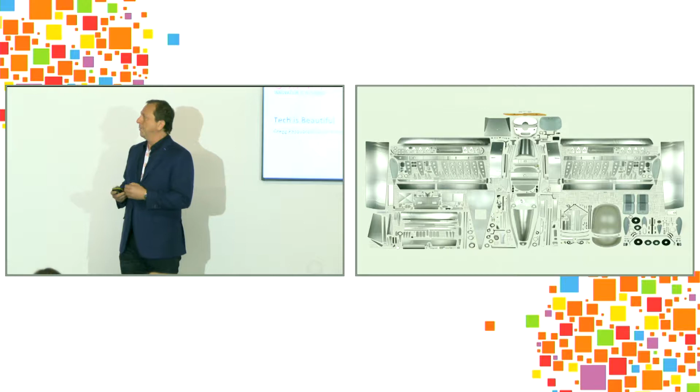So I think that one of the things that we did, I'll just tell you, was we started to question the way in which drawings were made, the way in which we documented not only the buildings that we wanted to make, but the cities that we wanted to have in the future. And so oftentimes we realized that the way in which architects communicate was not necessarily the best way to do it, so we started to think about new ways of drawing, new ways of production, and thinking about buildings more like products, and instead of construction, more like manufacturing.

And very early on in our research, we did some very small buildings that helped us begin to think about that, where the actual drawing set was very different. It was either instructions for machines to make the parts, and then visual instructions for people to put those parts together. Let's hope this guy works.

And then even the kinds of drawings that we're doing inside the studio right now, we realized that looking at plans, sections, and elevations, as architects and designers and city makers, we think in 3D, 4D, 5D, but then really we reduce a lot of that intelligence into 2D and then hand it to people who have to take that 2D information and bring it back out to 3D. And what we've learned is that if you really want to make these kind of special buildings, you need new kinds of drawing techniques in order to help people understand what you're doing, how it goes together, what the materials are, what the efficiencies are, and how to do it.

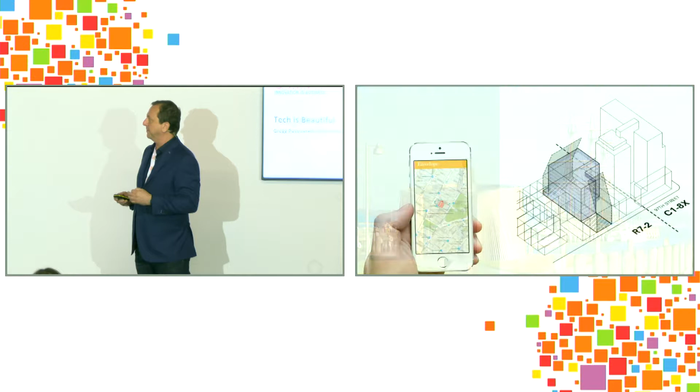And so we've now been pioneering technologies where the construction workers look at the models in the goggles in the field and understand exactly what they're supposed to do before they have to do it. And it creates a tremendous amount of clarity and transparency and efficiency in the project as a whole. And then that's the little building that we did, which was the first building that was completely fabricated in the United States, the first building that was completely fabricated by the computer. As an innovative firm, we also have created other kinds of software that have spun out of SHoP. We created a company called Envelope, which can take any site.

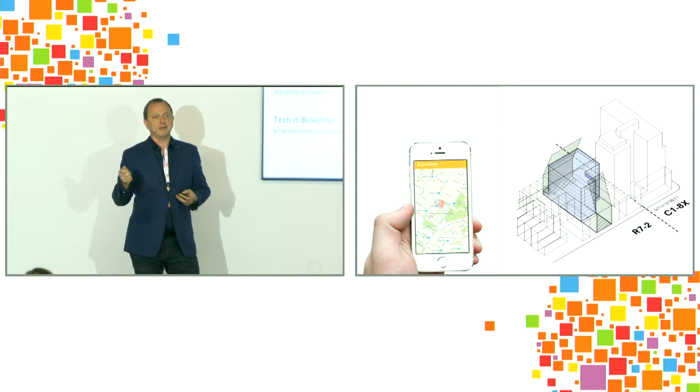We started in New York, but it's now going around the country, and we've had some interest from investors in Asia and in Europe, where it can take the zoning code and the building code and a property, and what would normally take a very good architect or land use attorney somewhere around 12 hours to figure out, you could do it on your iPhone in less than 60 seconds and tell you exactly what you can build,

all your options, you can model it, and it outputs it simultaneously to Revit to start your architecture drawings, but then also into the spreadsheets to run financial models, so that you can move the architecture around and watch the impacts on the materials, the cost, and how long it would take to get built.

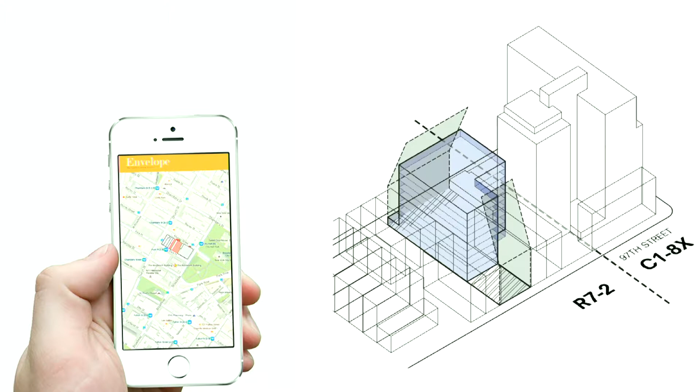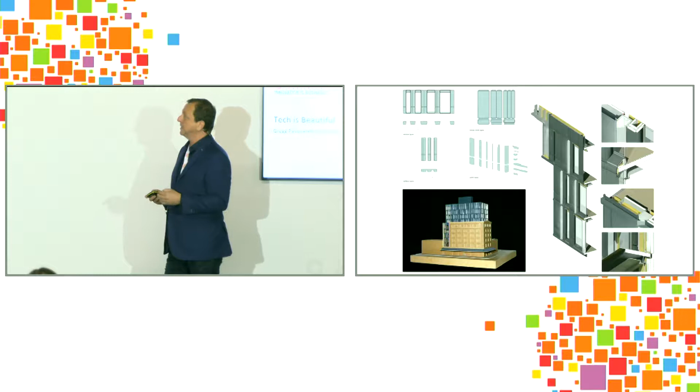To our very first building where we joint ventured as a developer, this was a building called the Porter House in the Meatpacking District. It was the first fully digitally fabricated facade in 2000, which had no drawings whatsoever, but went straight from a 3D model to producing 4,000 panels to going up onto a building, which was a mix of a modern new building over a landmark historic building below.

And again, this was an innovative thing, not only how we built it, but that we took an equity position in the project. And it was only because we took that equity position that our partners allowed us to try something so new as the first fully digitally fabricated facade in rainscreen in New York.

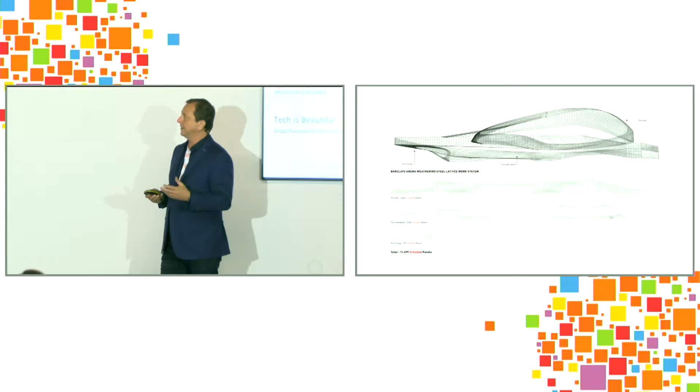And only 5 years later, because we had taken some risks on how you put that together, we were challenged with doing the Barclays Center, the new NBA home for the Nets in Brooklyn, where we did 11,500 different shaped panels of Corten steel on 920 mega panels. We wrote all the code, all the software, produced all the fabrication tickets, wrote our own iPhone app that tracked the entire process from cutting to weathering.

All the panels were hung on these dry cleaner racks and went through 15 wet-dry cycles a day for 4 months to put 10 years of patina on the project. And then it was all delivered and put onto the building, and it went together in record time. And so it was so interesting that going from a 5,000 square meter project and testing out these new ideas led us to the billion-dollar stadium only 5 or 6 years later.

And then you could see the interior, which was really about a sort of black box theater. It was also the first stadium in the United States ever built with 0 parking spots. The whole project was built around prioritizing the experience for those who come by public transportation over private transportation.

Other ways that we've used technology: we were challenged to take this landmark building in downtown Brooklyn as well. It had a spectacular interior, was completely falling apart, needed a lot of revenue to restore, and we wanted to propose putting about a 350-meter tower on top.

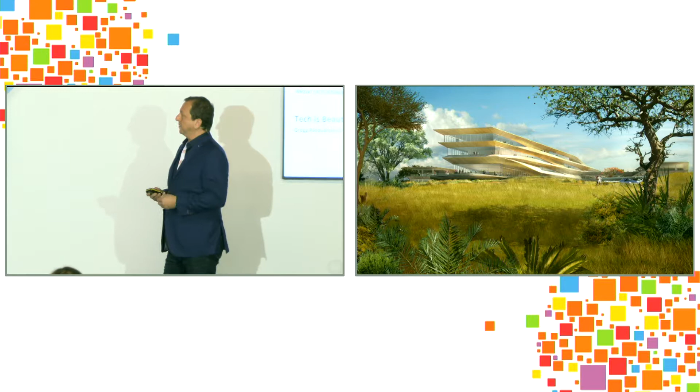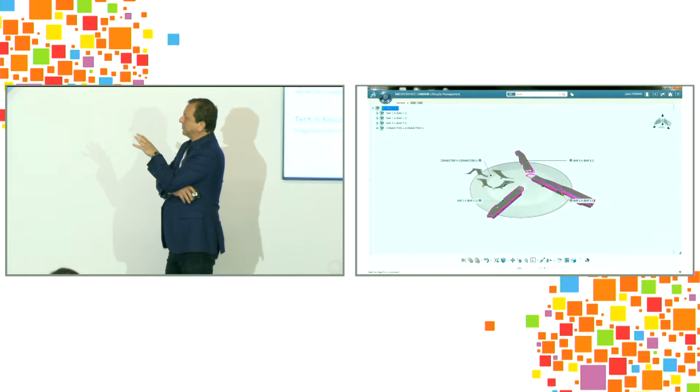But then this is a project that we are doing in Botswana, Africa. You can see these are the ways that we track the way that we build projects. And so it was really about doing this government complex. And this is software that we keep in the office to help us track the way we put these together. But we literally design every single part in the facade systems, and then we break them apart. We know every single piece.

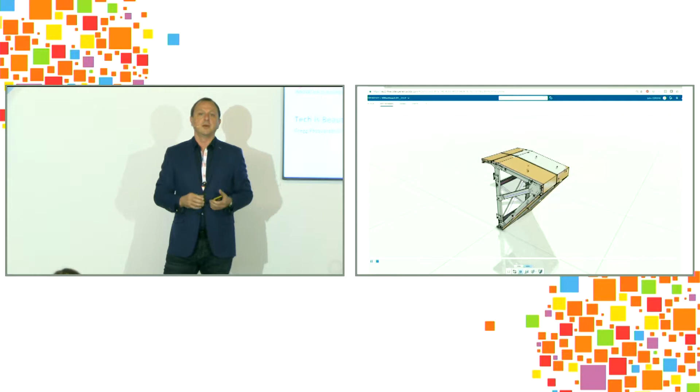It's completely tracked, and we can send it to dozens, if not hundreds or thousands of different fabricators, and they just get the instruction set digitally for how to fabricate each piece that's out there. Then the pieces are sent, and then they're assembled, sort of like the best IKEA furniture you could ever imagine. And we track these, and then we're able to know exactly where the parts are. They're numbered, they go together,

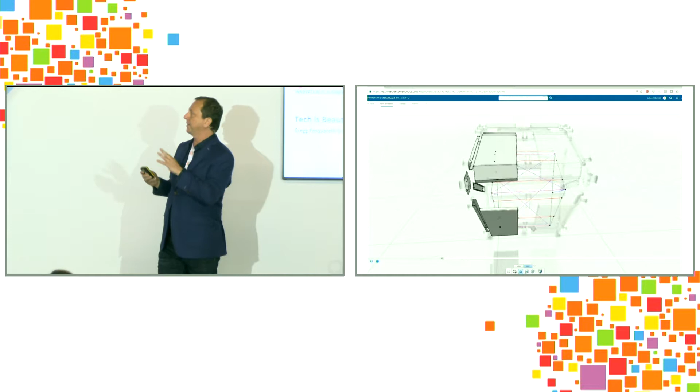and it's a very easy way to begin to build really beautiful, high-quality kinds of buildings at a very affordable price around the world. And so here you could see those pieces as they come in parts, and then they snap together and go on the building. And this is the building a couple months ago. It's just getting towards its finish.

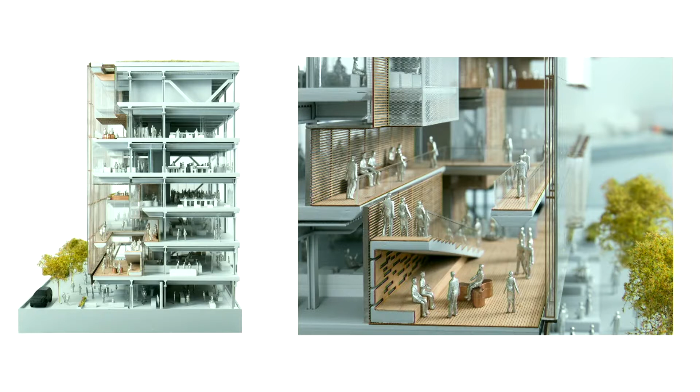So this is doing this kind of thing in a place that has very little skilled labor. We've spent a lot of time with knowledge transfer. We brought some of the fabrication equipment down to Gaborone in Botswana, and it's amazing how the building has gone together.

To another way of using technology, again, this is a sort of living, breathing building that we're doing for Uber's headquarters in San Francisco. And so the idea, Ben, it was great seeing your data about using the stairs. It was the same exact idea. And so the building, basically, only 60% of it is air conditioned and 40% of it is not air conditioned.

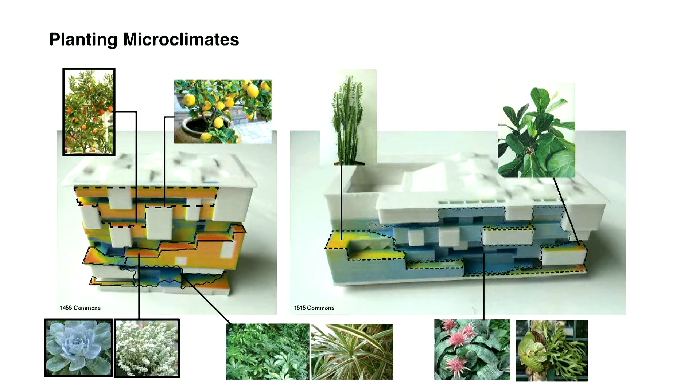And the facade lives and breathes, and it's basically built around a whole series of staircases and meeting rooms. And every single place that you collaborate, it happens within this front porch of two buildings that are then connected by bridges. And it was a huge amount of modeling on the data and the biophilia and the way in which we're putting the plantings in to help create and temper the microclimates in the building itself.

So here you could see kind of walking through those spaces. And then the entire facade is made up of bronze doors that are 5 meters by 2 meters, and they open and close automatically based on the local microclimates inside the building. And then basically the facade of the building, or the symbol that the company is showing out to the public, is watching the collaboration of all the people that are there working together. So the people become the facade itself.

And here it is under construction. It should be finished in about a year. Here you can see the bridges making the connections between the two.

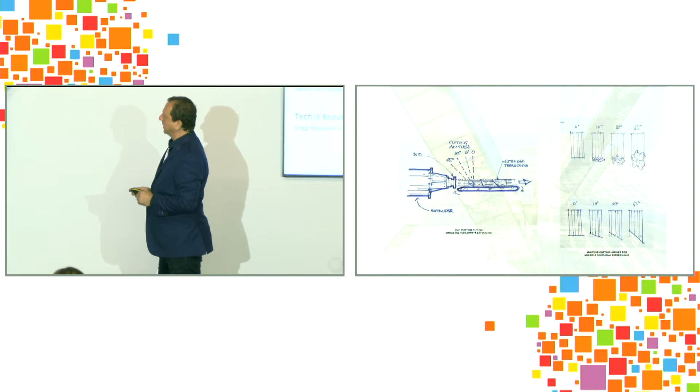To other experimental work that we've done just with materials. This was with a digital extruder of ceramics and using digital cutting elements in order to play with terracotta. This was for a pavilion that we did at the Milan Furniture Fair a couple of years ago. But just by adapting new digital technologies to a very traditional material, we're able to make something that we thought was incredibly beautiful.

It was very reasonable and inexpensive to make, but gave us a lot of research into ideas about using terracotta in new ways. And it was a really fun project that I think helped inspire us as we were working on another project that we're doing right now.

This one is on 57th Street in Midtown Manhattan, and this is about a 440-meter tall tower under construction, but it's only 20 meters wide. So it'll be the most slender tower in the world when it's completed.

And then the facade itself was a sort of system of using extruded, computer digitally fabricated terracotta and cast bronze in the filigrees, which sort of wrapped onto the shear walls that held the building up, and each one of these pilasters became one of the setbacks to create a new kind of silhouette building.

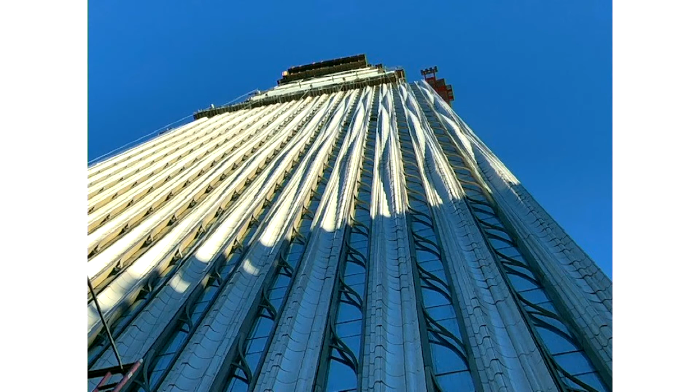And then, I literally took this with my iPhone about a month ago, so it's not a very high quality photo, but here you could see the terracotta. Because of the way we were fabricating it, we were able to rotate it. It was okay to make 26 different shapes and 6 different colors of cream, and it rotates back and forth so that when the sun hits it from the south, it creates these sort of arcing patterns of shadow and light on the tower as it goes up.

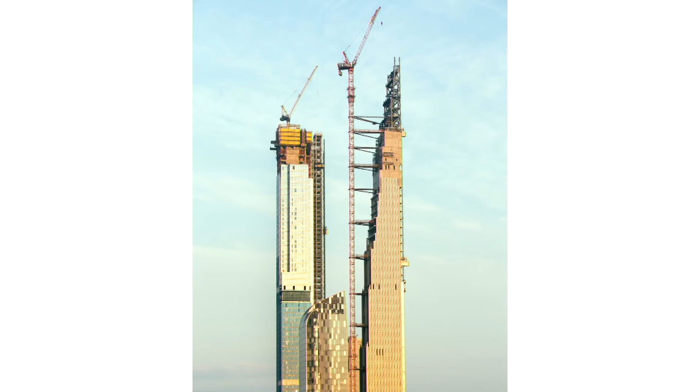Each apartment has a 20-meter living room facing Central Park. No, this is not part of New York City's affordable housing program. But again, here you could see the tower from Central Park. This was just taken a couple months ago. And we're literally putting in the last 20 pieces of steel in the coming weeks.

And so, it's a kind of remarkable building and one that's been super interesting for us to work on, to think about a building that we all have to live with every day and to make something that's very beautiful and something that connects to the history but is absolutely very contemporary and looking forward. There you could see the sort of shadows and light on the side of the terracotta as you look up from the tower, and what it looks like and its location to Central Park.

So, I think that as designers, as city makers, as people who deeply care about quality of life, it's important that we don't think of technology as just technology, but as something that inspires beauty, that makes wonderful places, that has a high quality of life. The most sustainable thing you can do is not cover a building with photovoltaics or any kind of technology. It's to make buildings that people love and take care of over time.

It's about making them dense and making them connected to mass transit. And if you're going to do that, you also have to invest incredibly in public space. Because if we're going to live in these very dense, packed cities, we need fantastic public space to make life bearable and enjoyable and inspirational. And so to us, it's really the beauty of that idea of living in these dense environments that are super sustainable, but using technology for actually bringing out the beauty in the world.